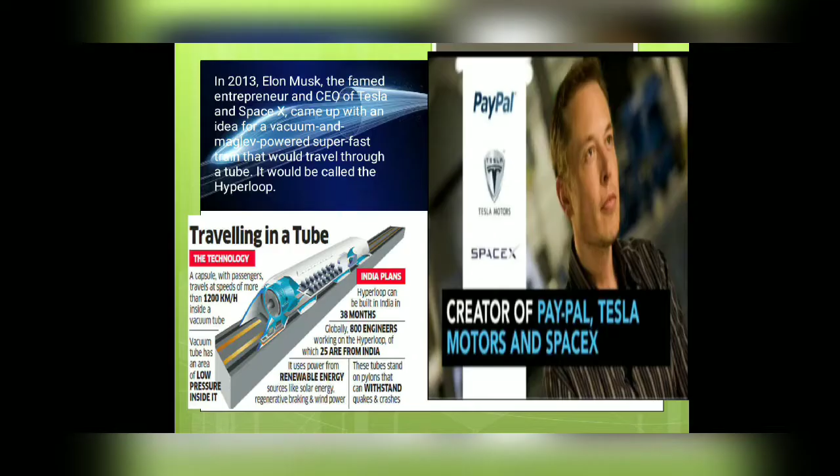In 2013, Elon Musk, the famed entrepreneur and CEO of Tesla and SpaceX, came up with an idea for a vacuum and maglev powered superfast train that would travel through a tube. It would be called Hyperloop. Basically, maglev technology is magnetic levitation technology. As Elon Musk is the creator of PayPal, Tesla Motors and SpaceX, he is a rich man and he is going to be a trillionaire too.

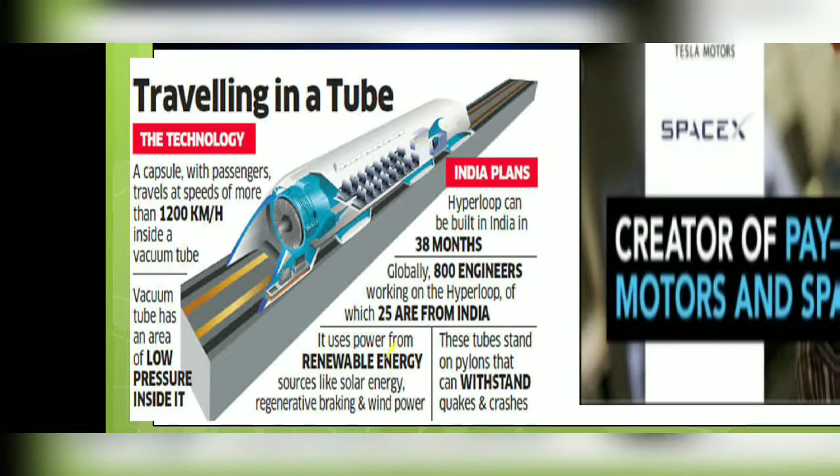So talking about this in India, traveling in a tube: a capsule with passengers travels at a speed of more than 1200 km per hour inside a vacuum tube. The vacuum tube has an area of low pressure inside it.

So India's plans are as follows. Hyperloop can be built in India in 38 months. Globally 800 engineers are working on it, of which 25 are from India. Basically it works on renewable energy sources like solar energy, regenerative braking and wind power. This tube stands on pylons that can withstand quakes and crashes also.

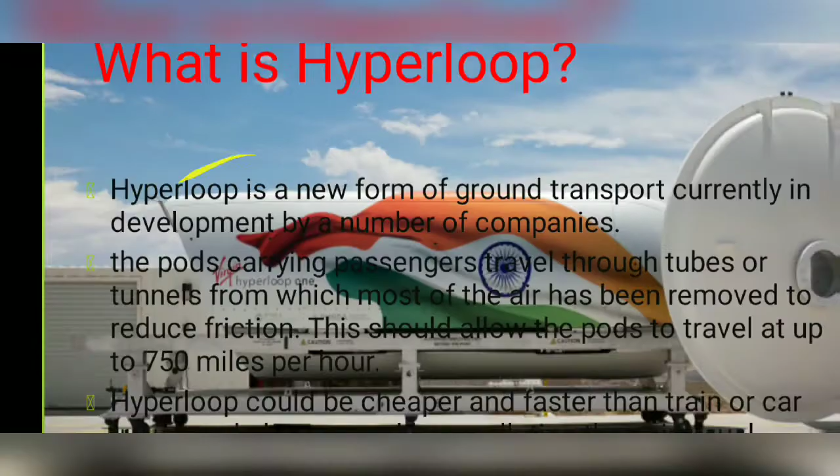What is Hyperloop? It is basically a new form of ground transport currently in development by a number of companies - meaning a single digit number of companies - various companies are working on it.

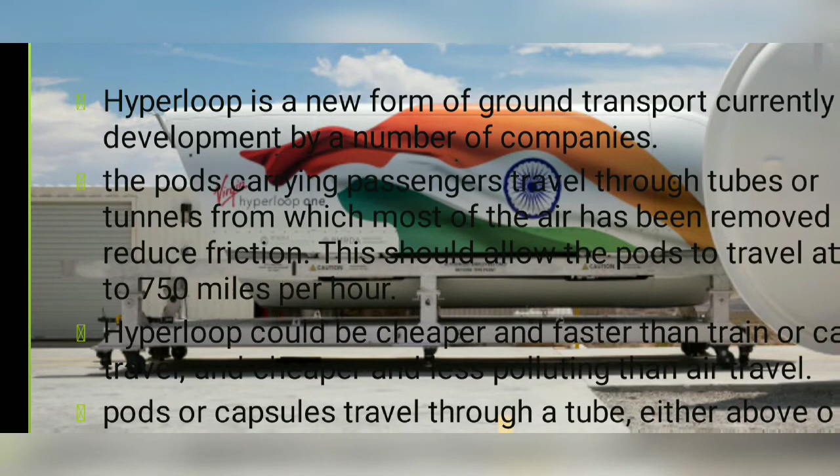The pods carrying passengers travel through tubes or tunnels from which most of the air has been removed to reduce friction. This should allow the pods to travel at up to 750 miles per hour, and the estimated speed is about 1200 km per hour.

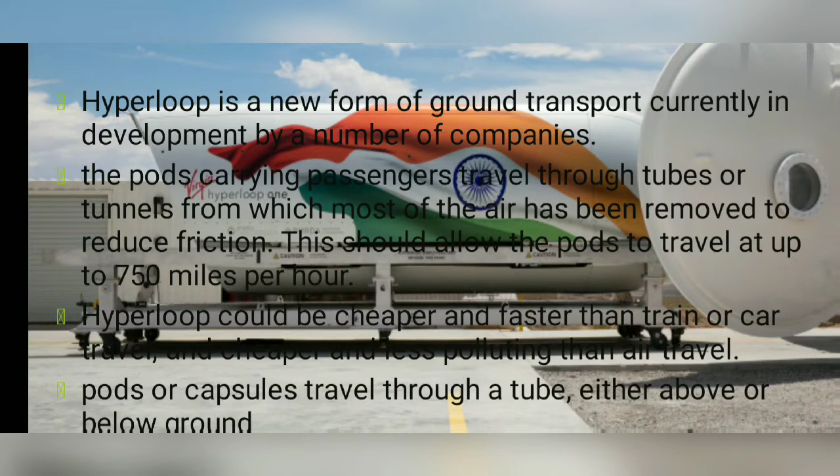Hyperloop could be cheaper and faster than train or car. Pods or capsules travel through the tube either above or below the ground, and it would be the cheapest mode of transportation in this world. So it will be the fifth mode of transportation.

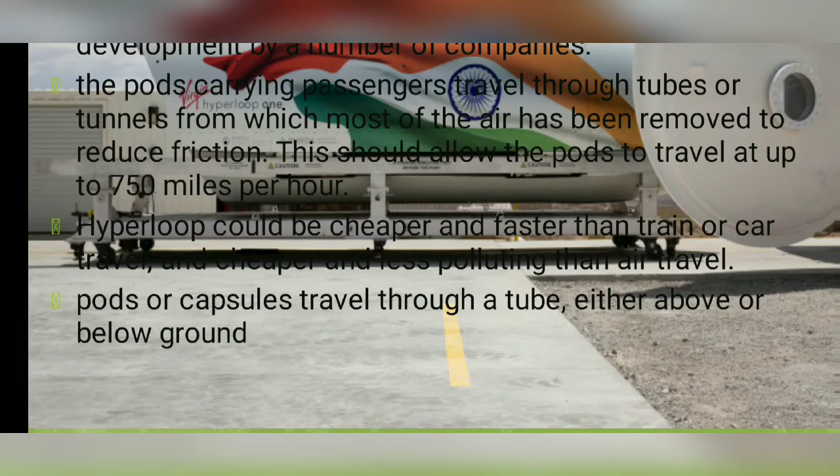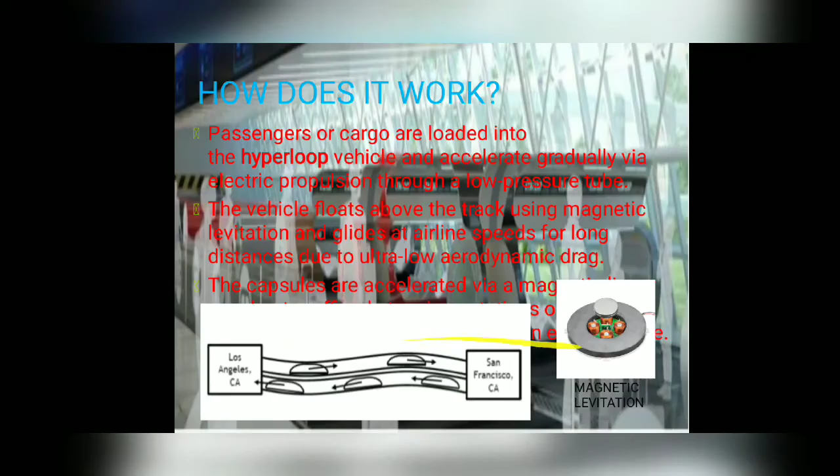So how does it work? Passengers or cargo are loaded into the Hyperloop vehicle and accelerate gradually via electrical propulsion through a low pressure tube. Low pressure tube means the pressure inside the tube has been removed.

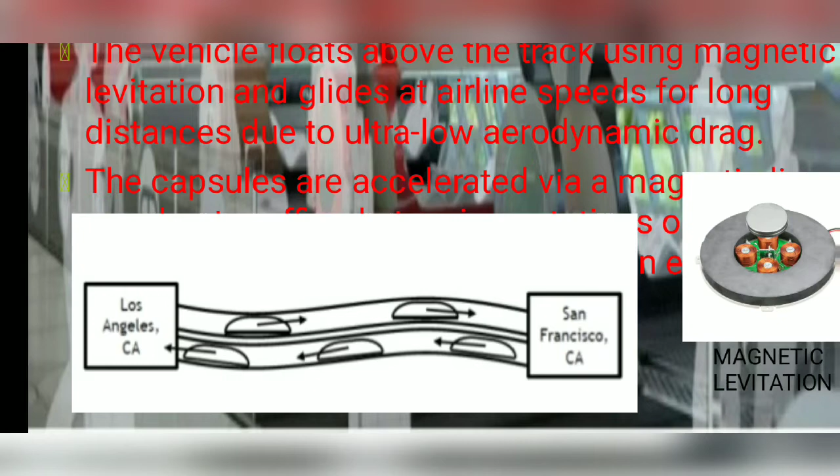The vehicle floats above the track using magnetic levitation, that is maglev technology, and glides at airline speeds for large distances due to ultra low aerodynamic drag. This picture shows that the Hyperloop can travel in both directions, coming and going, using magnetic levitation technology. The magnet is raised up due to the conduction occurring there.

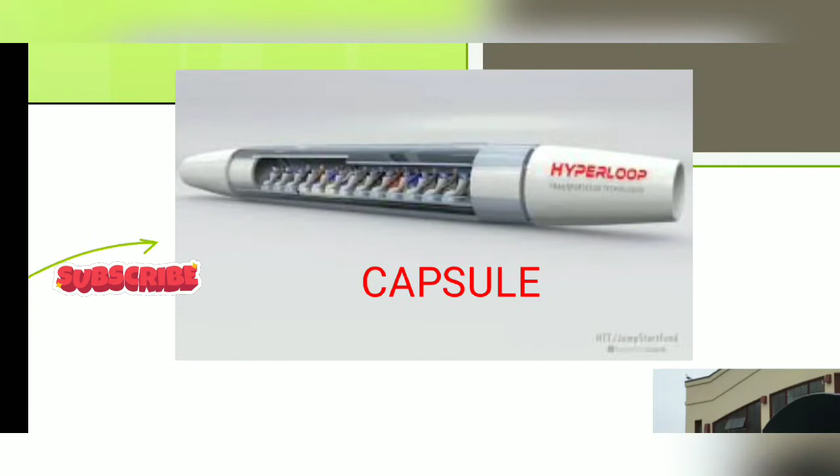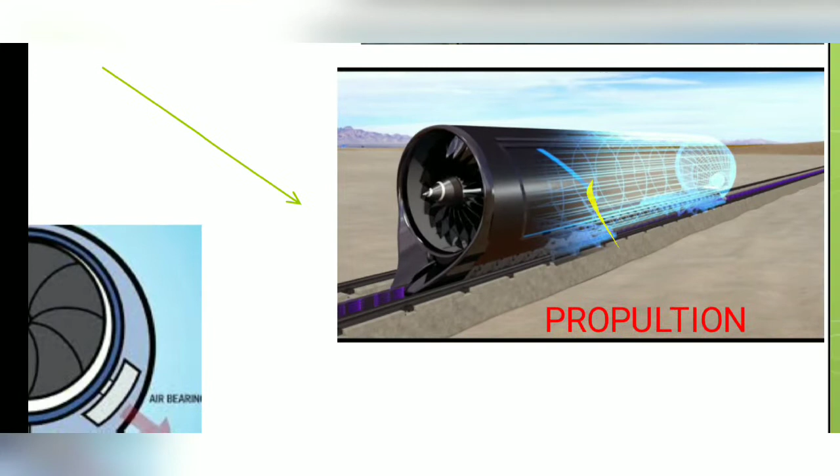So basically there are four components involved in a Hyperloop. First is the capsule, you can see the picture of that. The second thing is the tube, which is the main component of the Hyperloop. Third is propulsion, also a main part because it propagates the Hyperloop through the track. And the fourth is air bearings and rotor, as you can see.

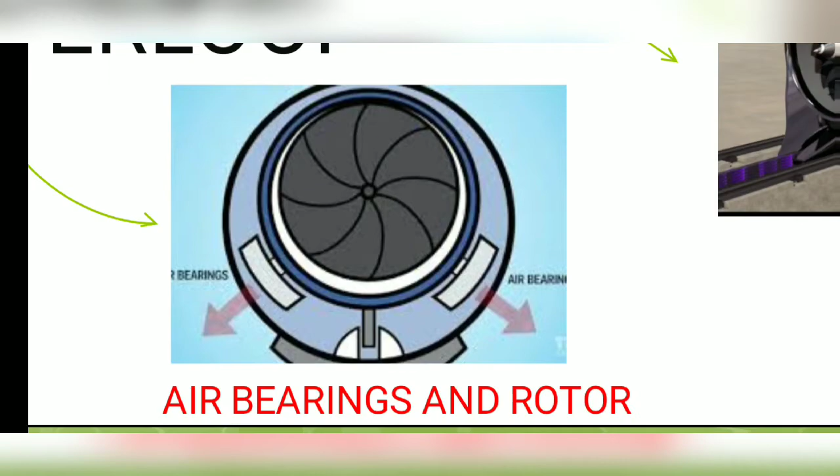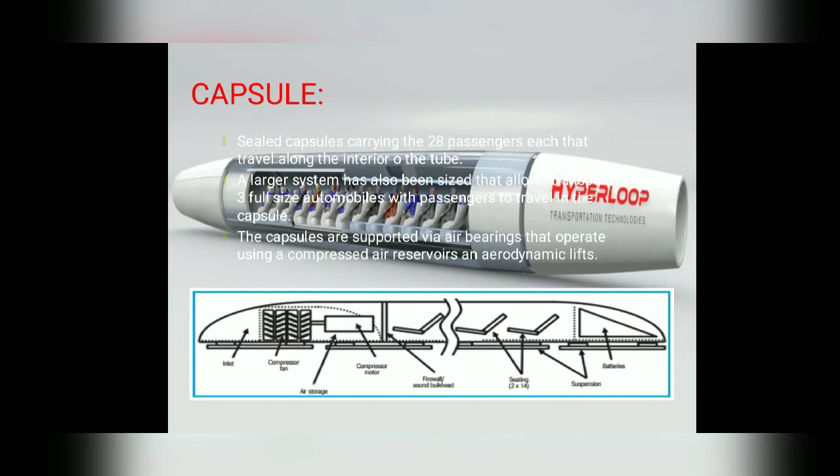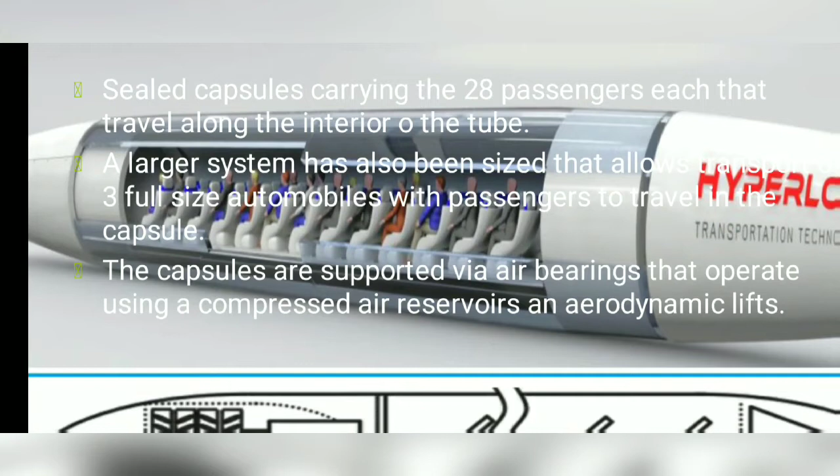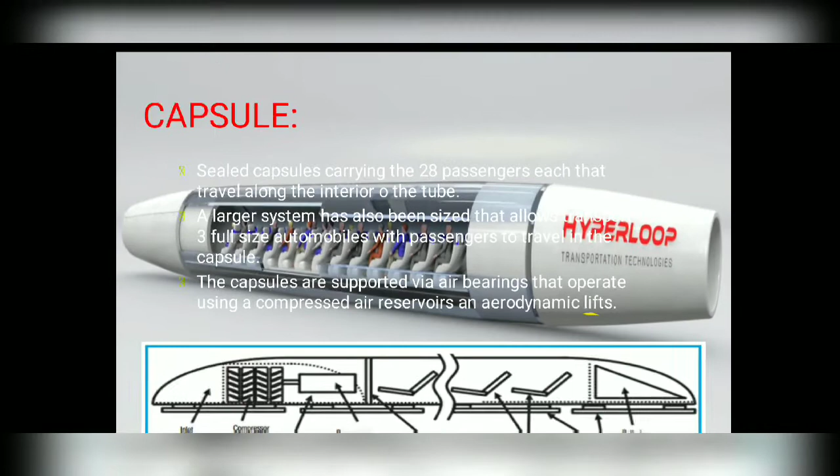Talking about the capsule, it is a sealed capsule carrying 25 to 28 passengers each that travels along the interior of the tube. A larger system has also been sized that allows 3 full-size automobiles with passengers to travel in that particular capsule. The capsules are supported via air bearings that operate using compressed air reservoirs as an aerodynamic lift. You can see the basic structure of a Hyperloop, where the luggage compartment, propulsion system, and passengers are going to be fitted into it.

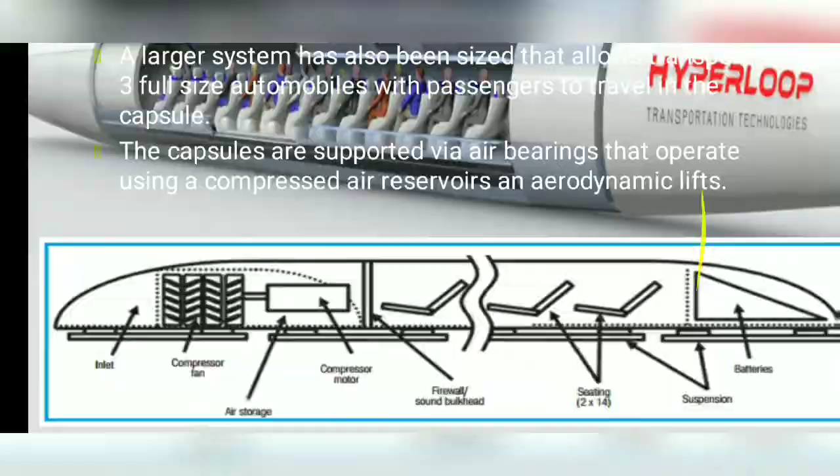So it has an inlet valve, compressor fan, air storage, and the seating capacity, suspension, batteries - and that's the overall structure of a Hyperloop. So let's get to another component.

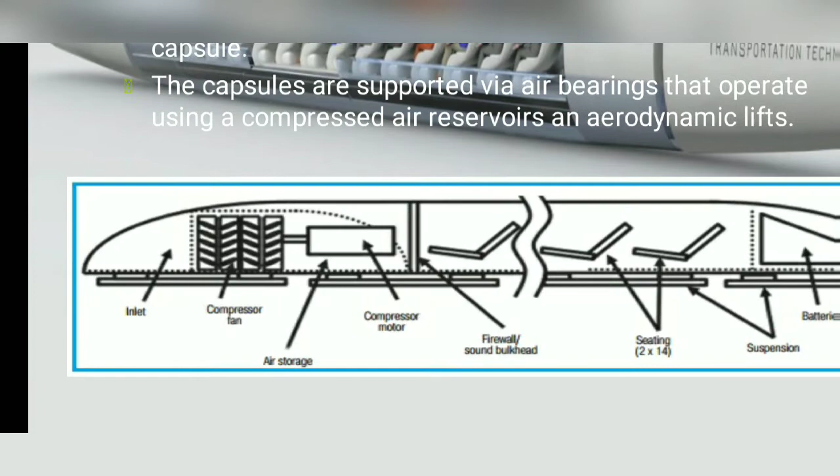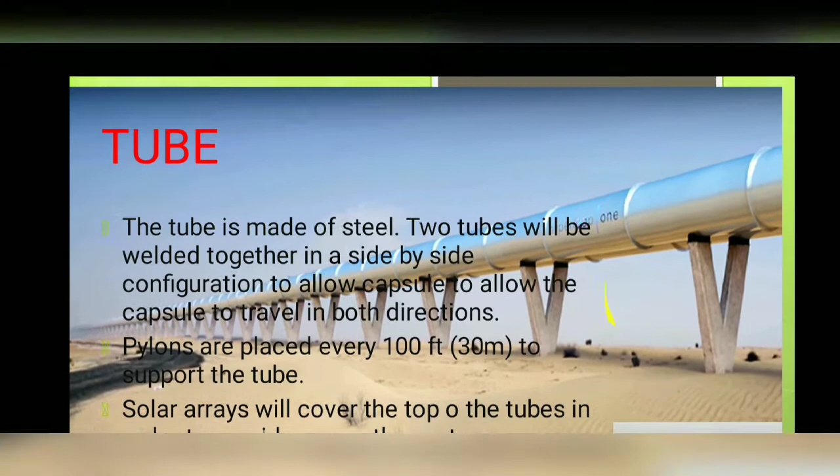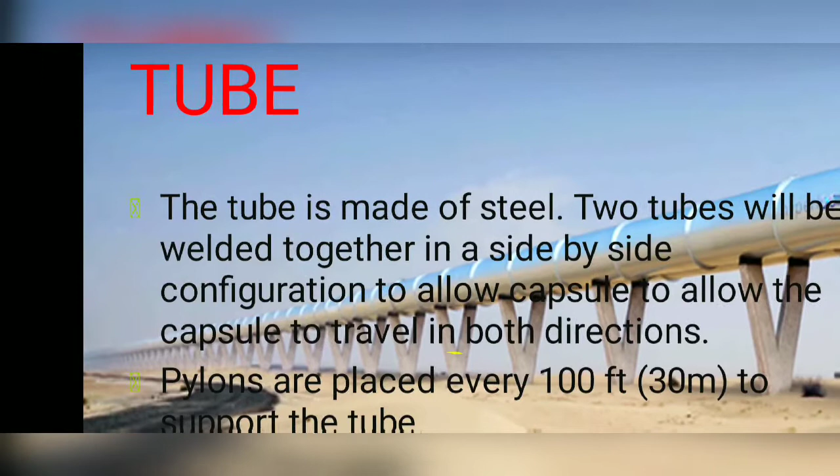Another component is the tube. The tube is made up of steel. Two tubes will be welded together in a side-by-side configuration to allow the capsule to travel in both directions - one coming and one going. Pylons are placed every 100 feet to support the tube. 100 feet means 30 meters.

Solar arrays will cover the top of the tubes in order to provide power to the system. These are being made by a new material called vibranium.

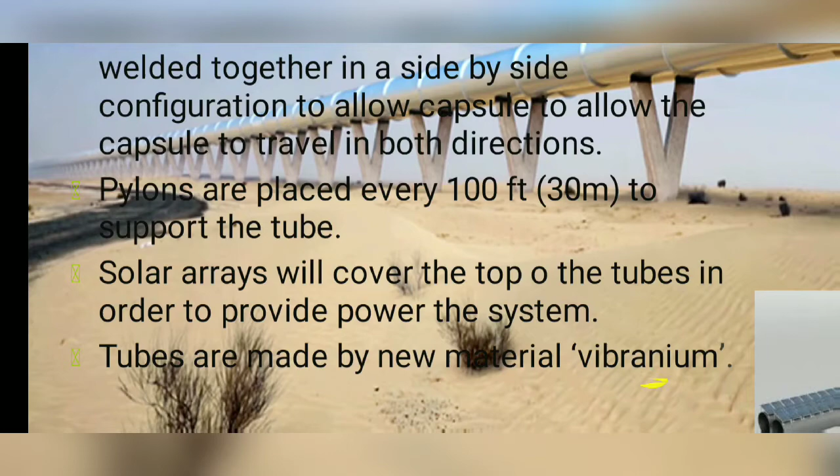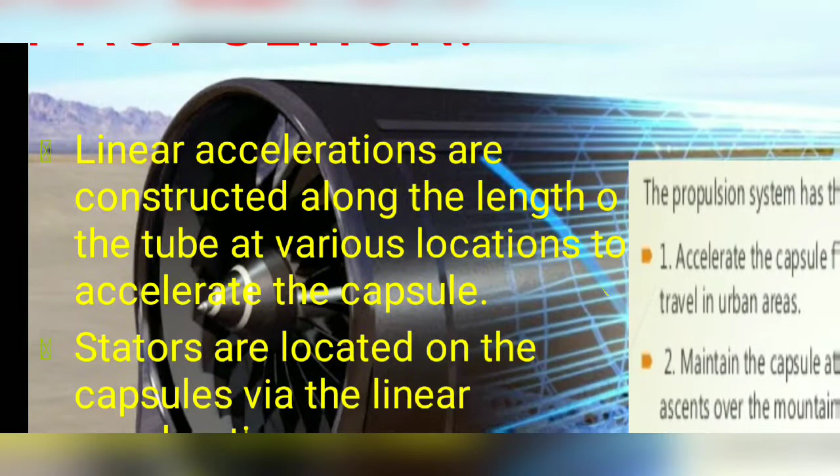Coming to the propulsion system, it is basically linear accelerators constructed along the length of the tube at various locations of the hyperloop to accelerate the capsule. Stators are located on the capsules via the linear acceleration, so the stator helps to run the hyperloop.

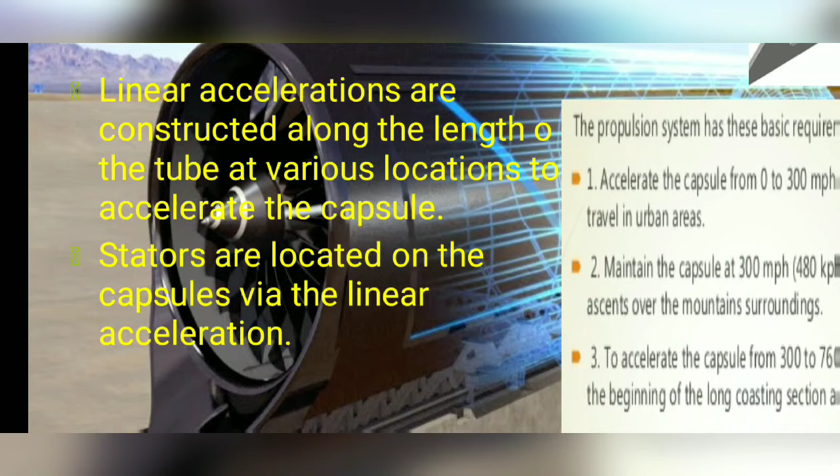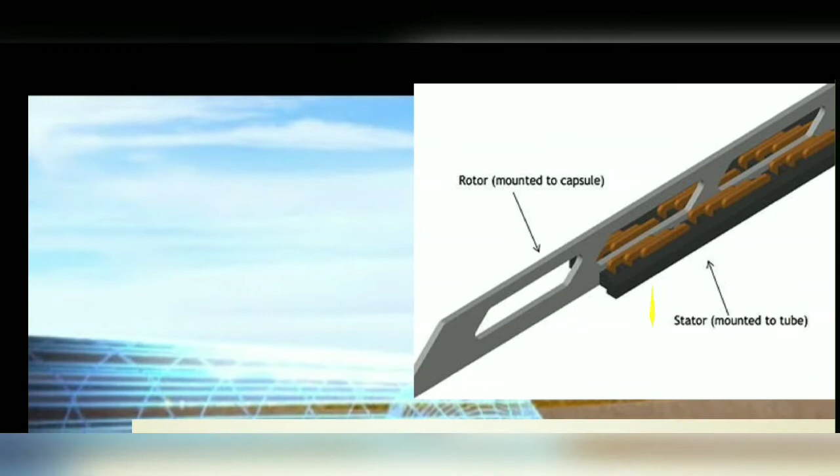Coming to the propulsion system, this has some basic requirements. You can see the rotor mounted to the capsule and the stator mounted to the tube. The basic requirement is to accelerate the capsule from 0 to 300 mph for relatively low speed travel in urban areas.

Maintain the capsule at 300 mph as necessary, including during ascents over mountain surroundings. It also helps to accelerate the capsule from 300 to 760 mph at the beginning of the long coasting section along the I-5 corridor, and to decelerate the capsule back to 300 mph at the end of the I-5 corridor. It is also considered an important part of the hyperloop.

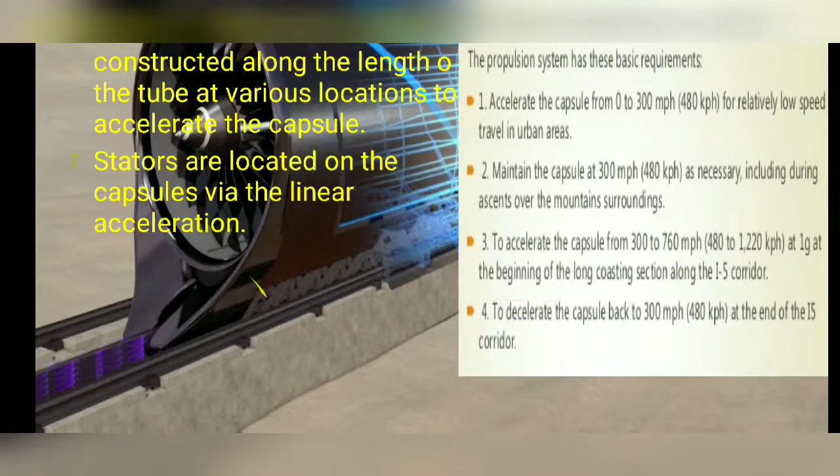These are the bearings that use a thin film of pressurized air to provide an exceedingly low friction load bearing interface between surfaces; the two surfaces do not touch. Suspending the capsule within the tube presents a substantial technical challenge due to transonic cruising velocities. Conventional wheel and axle systems become impractical at high speed due to frictional losses and dynamic instability.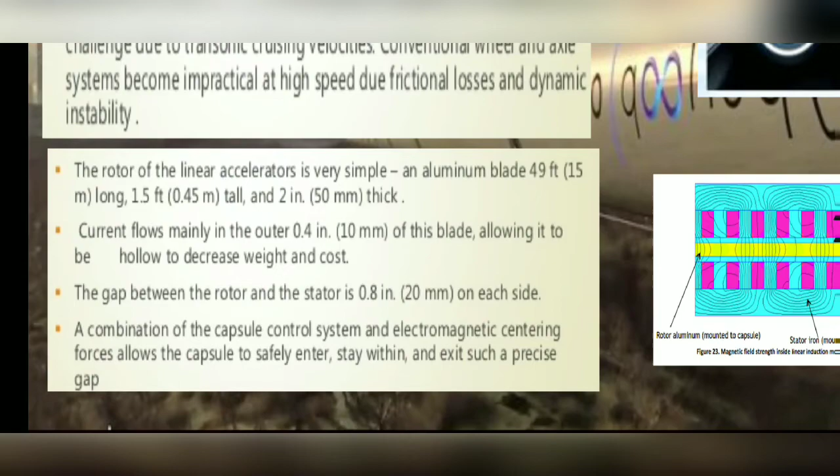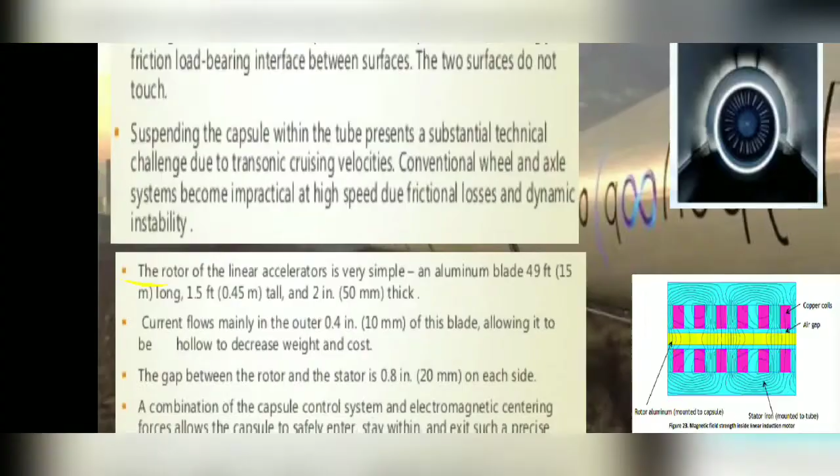So these are the basic requirements required in it. Coming to the requirements, the rotor of the linear accelerator is very simple, an aluminum blade. It is 49 feet (15 meters) long, 1.5 feet (0.45 meter) tall, and 2 inches (50 mm) thick. Current flows mainly in the outer 0.4 inch (10 mm) of this blade, allowing it to be hollow to decrease weight and cost.

The gap between the rotor and the stator is 0.8 inches (20 mm) on each side. A combination of the capsule control system and electromagnetic centering forces allows the capsule to safely enter, stay within, and exit such a precise gap.

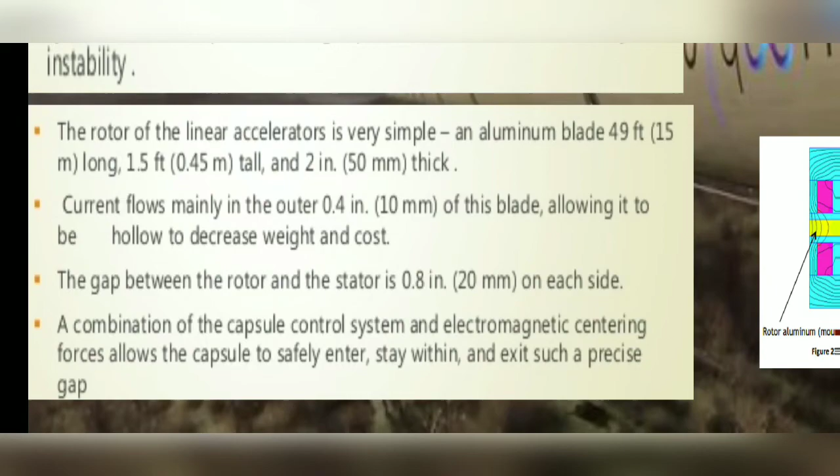So basically these were the requirements in it. You can see the rotor image used in the hyperloop, and this is the magnetic field strength inside the linear induction motor: rotor aluminum mounted to the capsule, stator iron mounted to the tube. These are required in the hyperloop.

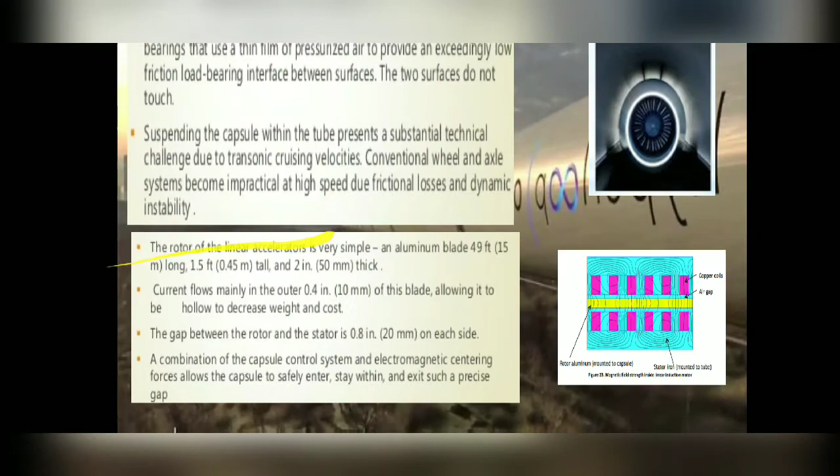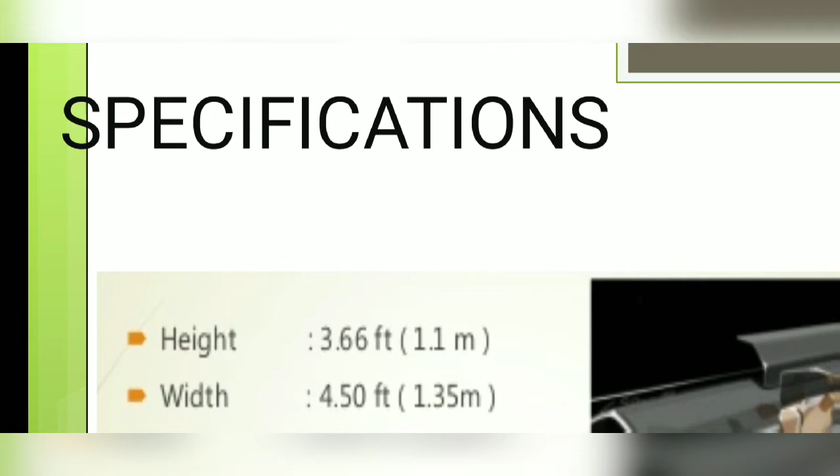Coming to the specifications, the hyperloop height should be about 3.66 feet (1.1 meter), and the width should be 4.50 feet (1.35 meter).

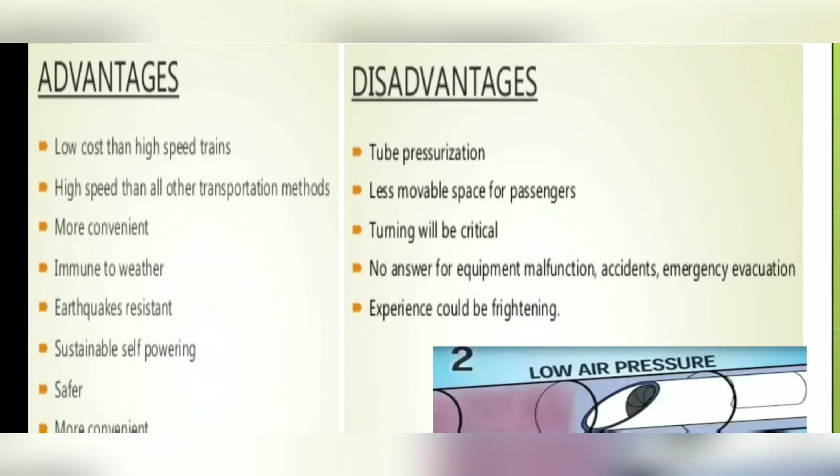Talking about the advantages and disadvantages of the hyperloop: the advantages are low cost compared to high speed trains, higher speed than all other transportation methods, more convenient, immune to weather, earthquake resistant, sustainable, self-powering, safer, and more convenient.

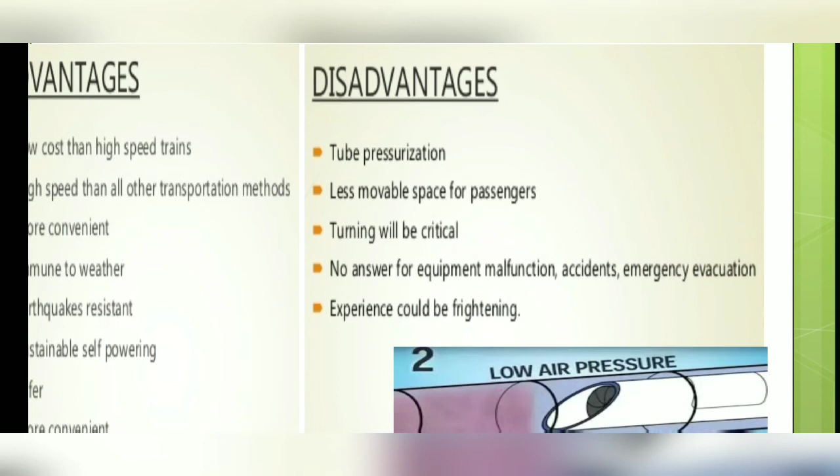The disadvantages are tube pressurization, less movable space for passengers, turning will be critical, the experience could be frightening, and there's no clear answer for equipment malfunction, emergency, or accident evacuation.

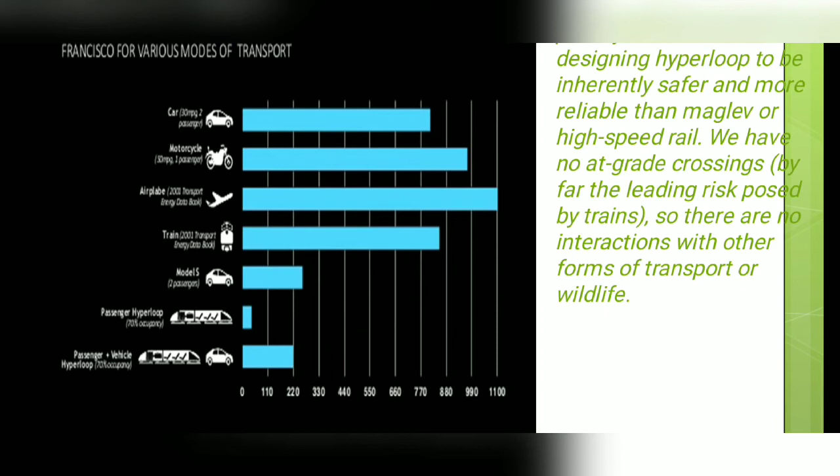Basically, the graph shows how hyperloop could be cheaper than other forms of transport. There's a safety quote there.

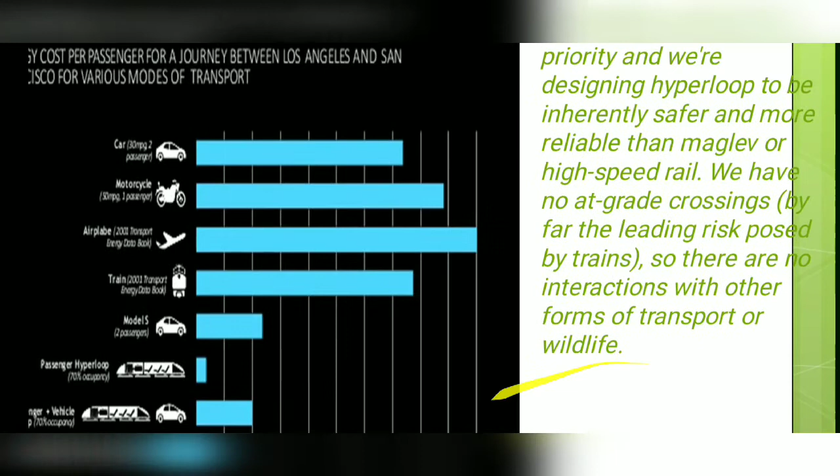Safety is our number one priority, and we are designing hyperloop to be inherently safer and more reliable than maglev and high-speed rail. We have no at-grade crossings, so there are no interactions with other forms of transport or wildlife.

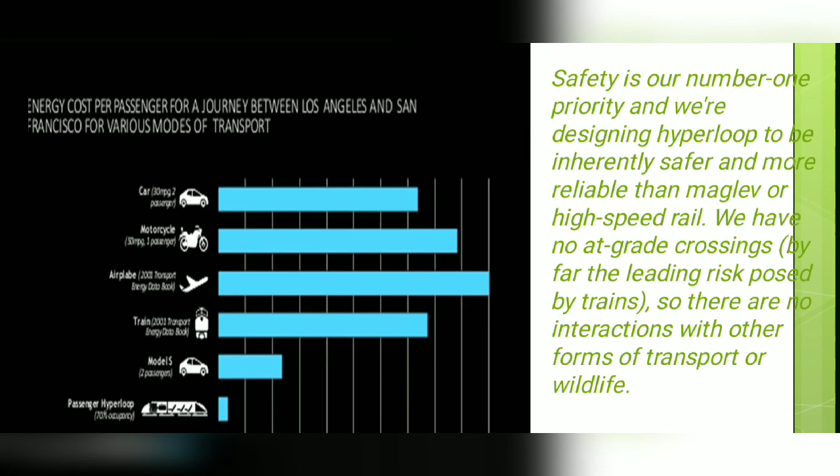Coming to the conclusion of the topic: the proposed design would achieve cost reduction. Speed is also one of the most important advantages of the system. It surely is a fast, safe, and cheap way of transportation. With this, we can surely say that we are one step closer to the future we all desired and will continue to desire.